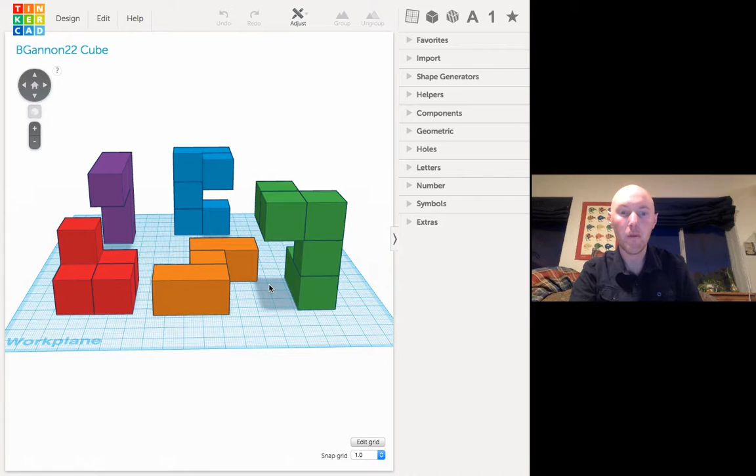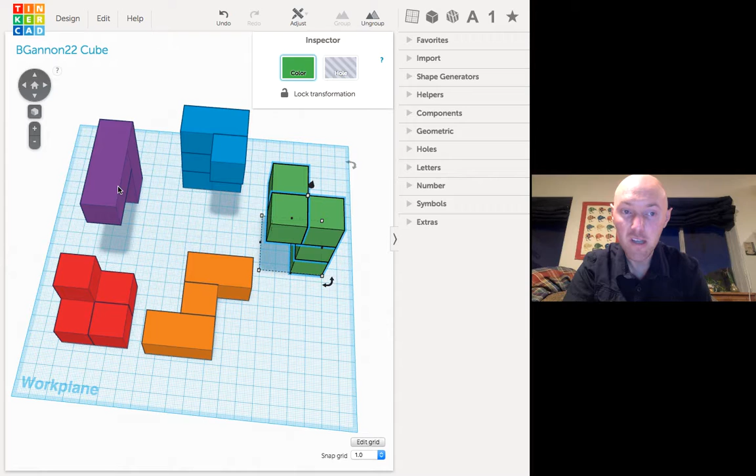One thing to note, so I have all my pieces and they're separated, and I should probably move this green over a little bit because it's on top of the orange. We just need to keep them separate because when I download this here, it's going to download as an STL file, which is a file for our 3D printer.

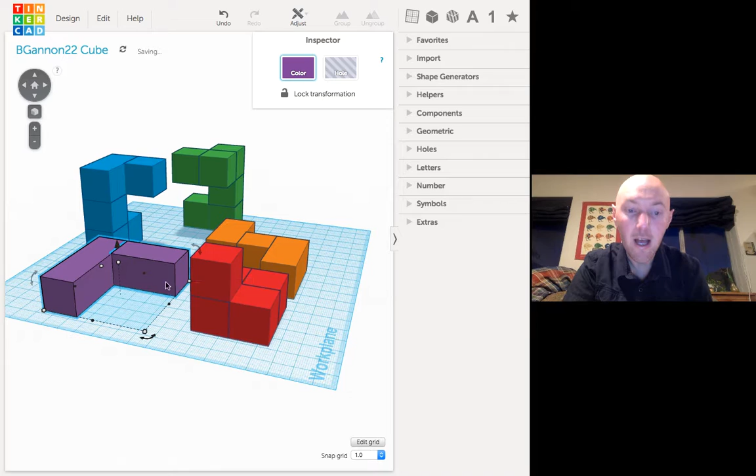I'm also going to need to make sure that I can rotate some of these things around here. So I built it in a certain way, but I need to make sure I can rotate all of these pieces here and bring them down to the platform, because this will be a lot easier to print, so we're not printing this giant gap right here or this giant gap right here. That just takes up a lot more filament, and sometimes it does not go as planned.

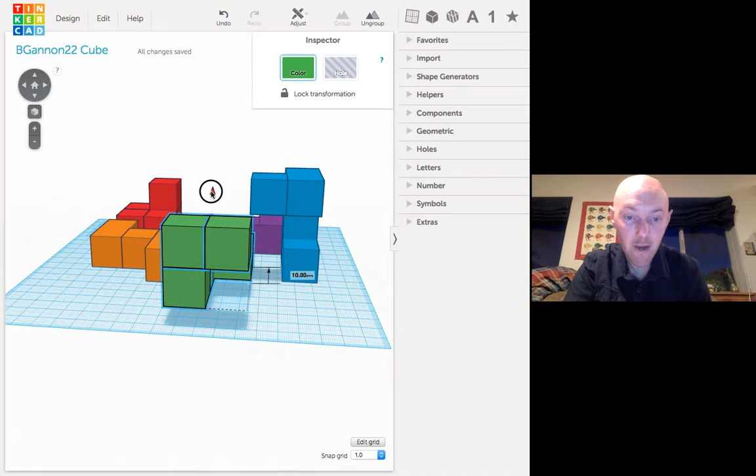It's 90 degrees, and I just need to bring this down to the surface, so it should not be floating in the air. I will be looking at all these before we print them. And you can see the orange and green are touching a little bit, so bring that over here. And I'm going to bring this over here.

And then I also want to rotate this guy around here. And I'm going to rotate it 90 degrees. Like so, and bring it down to 0. So there you go. There I can see what my cube may look like.

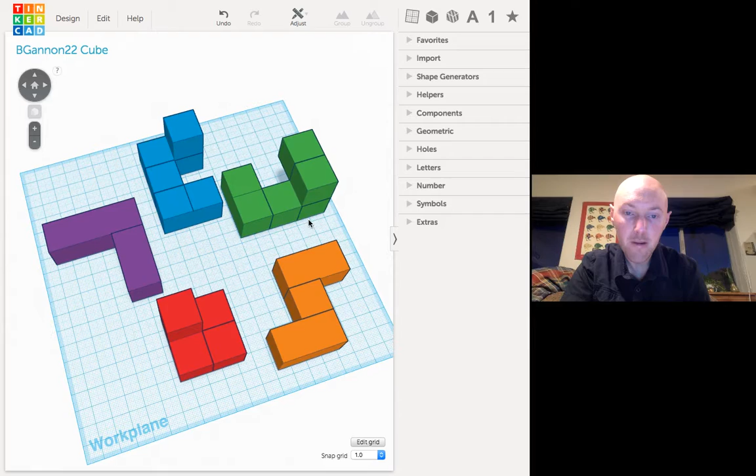Now I am going to end up printing, oh nope, I don't want to do that. So I can rotate this another way, the green here, so that I don't have to use any support when I print. Support just prints underneath to provide a solid surface so that nothing is going to be broken. But here you can see this is my cube that I have, and this is the same exact cube that you guys can see in the class, the big giant cube.

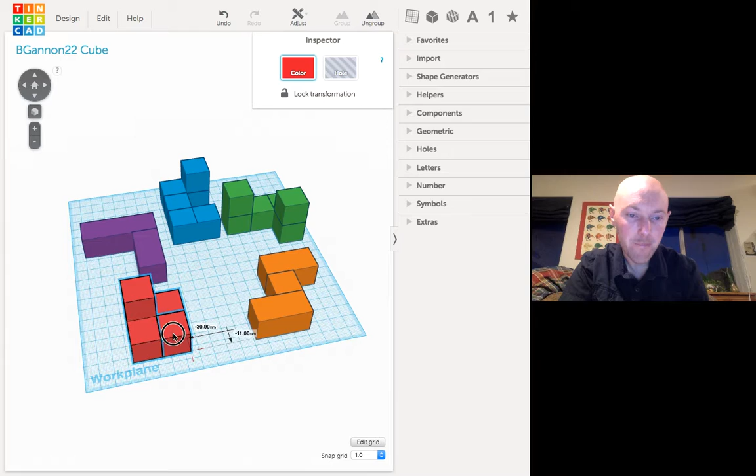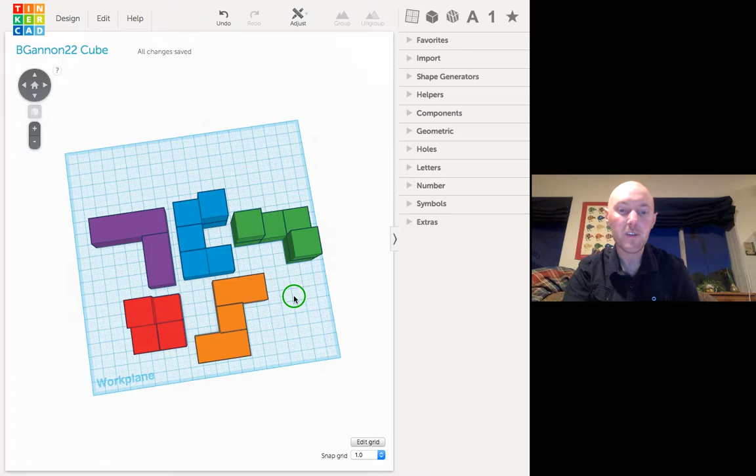I'll move some stuff around. We just want to make it as close as possible because that will take less time when I actually go to 3D print everything. So if I move everything right next to each other, this will take a lot less time to 3D print. Cool, just like that. So we can see that, and I just literally dragged cubes over. I'm not changing the cube size of anything.

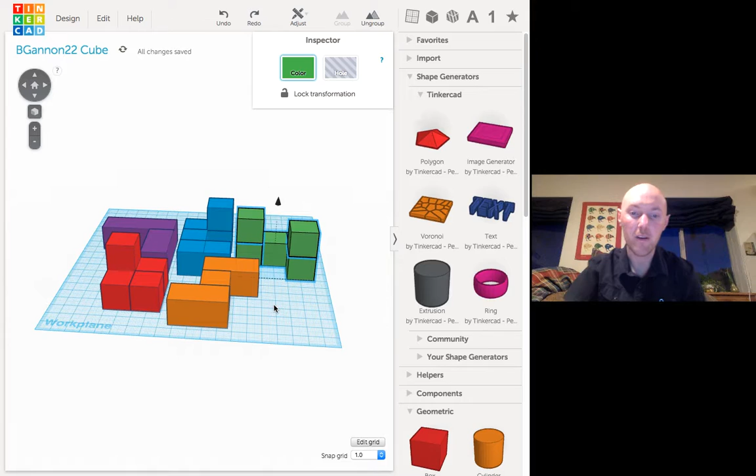So I believe cubes are under geometric and just the box, dragging the box over and just putting boxes on top of one another. Now I have grouped them together. If I ungroup it, you can see what happens, and then I can start moving each and every piece. But I don't want to ungroup it, so I'm going to undo that. Another key is F. Remember the key F to focus. That's great. Click on something and F focuses in, and then I'm using 2 fingers to rotate around my platform.

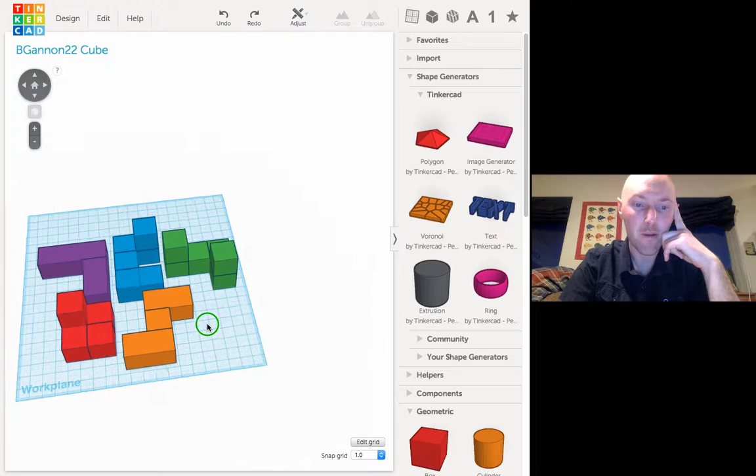Now we are gonna hopefully print this. So what I need everyone to do once you build your cube, first thing, and you guys are gonna be in this version here. I can't just copy and paste this over, but imagine you have your cubes built right here on this screen. And you just go up here, and I want your first initial, last name, graduation year, and then cube.

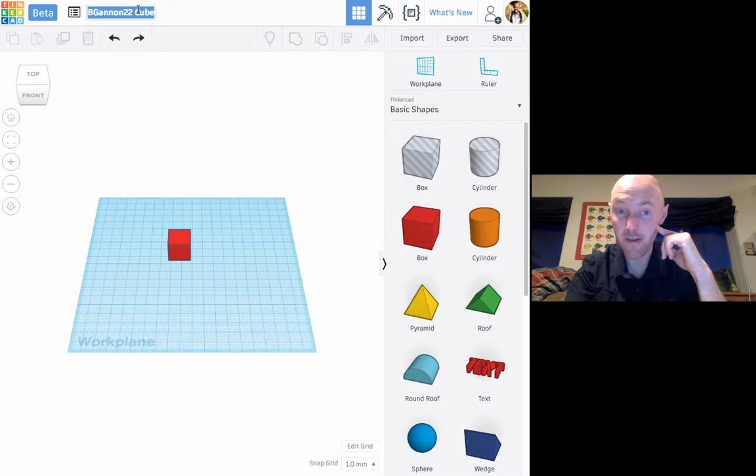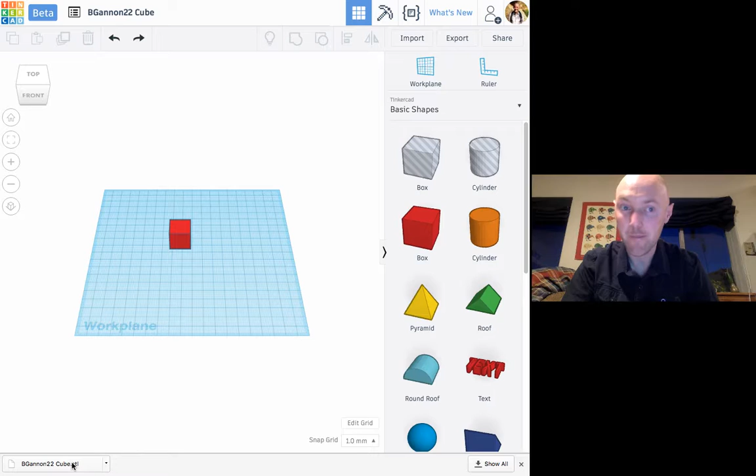And then, once you do that, you're going to export it up here, and export it as an STL. And then it should pop up, downloaded right there. Now that file, you may not be able to open it on your computer. You need a specific program to open that. You can download that from self-service, but we're going to talk about that next week or the week after. Upload this file to Canvas, and I will give you some feedback on it next week.